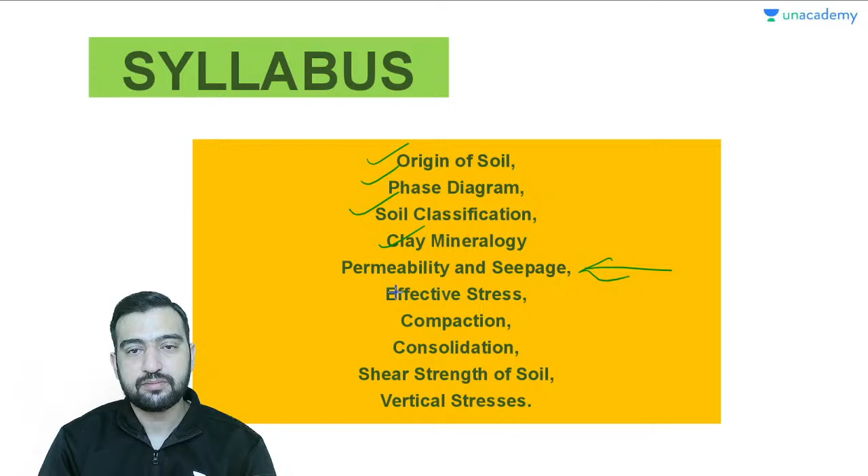Chaliye, so now let's start session number 23, and this session is really very important. Topic for today's class is FlowNet. You can say it is the last topic of the seepage chapter, so after today we will be closing this chapter as well. This is the last chapter, last topic of seepage.

FlowNet. So what do you think FlowNet is? Tell me, any idea anyone? Okay, see, I'll tell you.

There is a Laplace equation. The Laplace equation is like kx, del square h by del x square, plus ky, del square h by del y square, is equal to 0. This is known as the Laplace equation for the flow of water for an anisotropic soil.

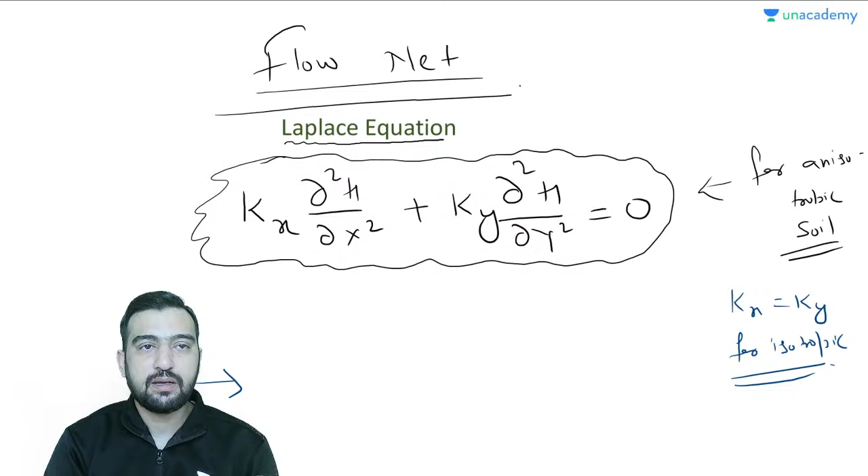But what happens if your soil is homogeneous and isotropic? In that case, your kx and ky are same for isotropic soil. Then you can write it like this: del square h over del x square plus del square h over del y square is equal to 0. So this is for isotropic soil.

So what is h? H is head. What is x and y? X and y are the dimensions, so water is flowing in the xy plane. Kx and ky were the permeability. When both permeabilities are same, we can take this permeability term common, and then we can write this differential equation. Is it clear?

Is it clear? Tell me any doubt? Saman Kumar, is it not clear?

My dear Saman, see, it is the continuation on seepage, and I have just told you a mathematical Laplace equation which is going to define your flow within the soil with respect to, you can say, boundary conditions.

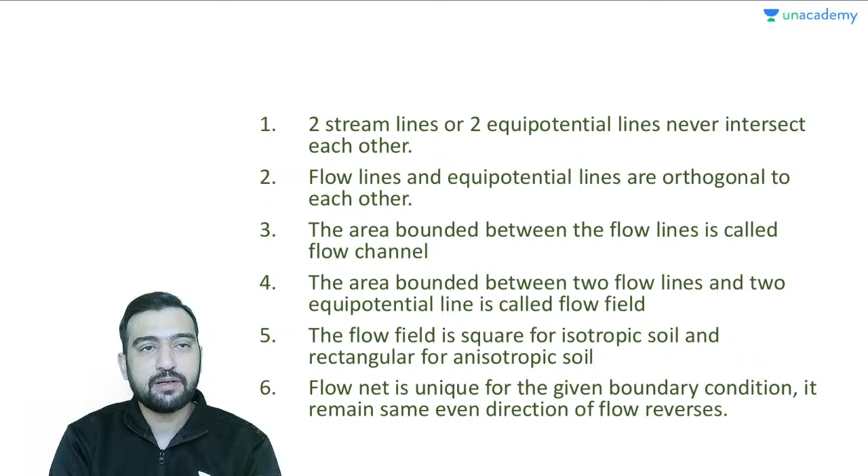So there are some properties of flow net. There are some properties of flow net. I will explain it.

What are the properties of flow net? Ravi Kumar Gupta says it is a 2D analytical method. Yes, you can say that, but we will not be studying the analytical method here.

This is a two-dimensional equation, and if you can solve this equation, you will get its solution analytically. But I am not going to solve this two-dimensional thing using the analytical method here. I don't have to use partial differential equations. I am simply going to use the graphical solution of this.

So the graphical solution of this equation is your flow net. Basically it is this equation only, and if the equation comes in anisotropic condition, we have to revise our flow net.

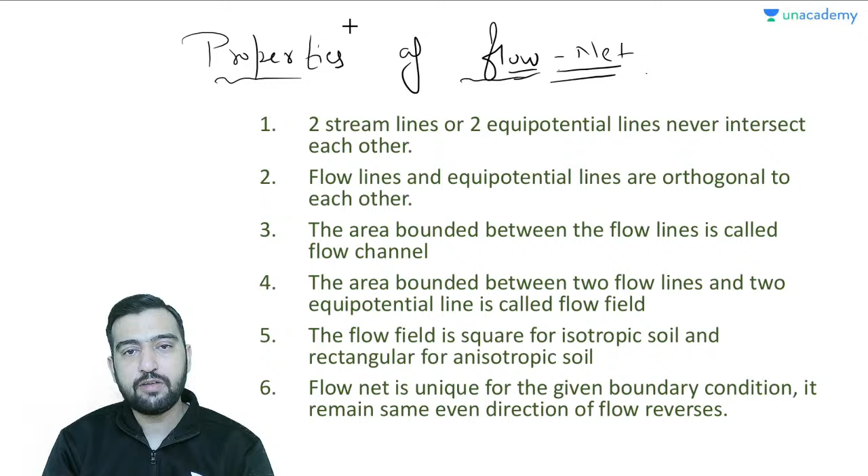So there are some properties of flow net. I will be drawing the flow net here and explaining the things one by one, showing what happens when you go into the soil system.

Let's say these are your streamlines, and let's say these are your equipotential lines.

You have to understand these properties very well. You are having these equipotential lines and this streamline. I am going to call these streamlines psi 1, psi 2, psi 3.

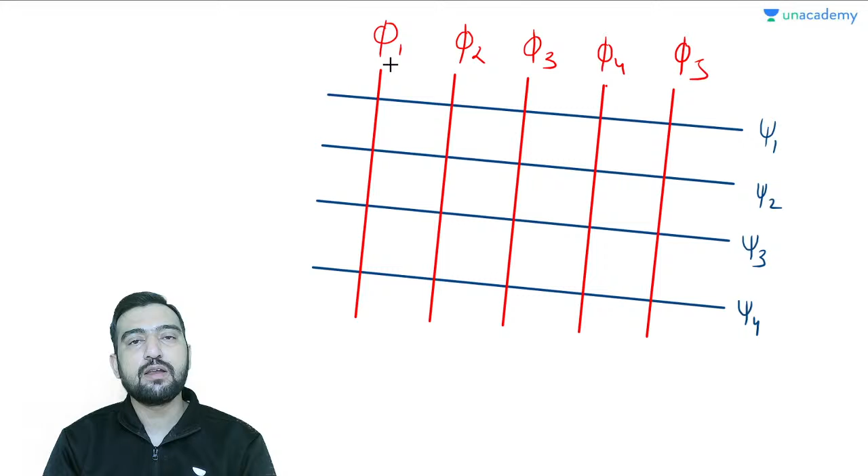Along this equipotential line your total head would be the same. Along phi 2 your total head would be the same. So whether the flow goes from here to here or from here to here depends on whether phi 1 is greater than phi 2, or phi 2 is greater than phi 1.

One thing is sure: if this is greater, flow would be rightward, and if this is greater, flow would be in this direction. This is because it is a common rule of nature that flow always occurs from higher potential to lower potential.

So psi 1, psi 2, psi 3, psi 4, etc. are the streamlines, meaning flow occurs along these streamlines, and these are your equipotential lines. So if you consider any such field,

this is known as your flow field, and these lines and this field are formed by the area enclosed between two consecutive streamlines and two consecutive equipotential lines. Is it clear or not?

So there are three passages here: passage number 1, passage number 2, passage number 3. These passages are known as flow channels. What am I going to call them? I am going to call them flow channels. Is it clear? These are known as flow channels.

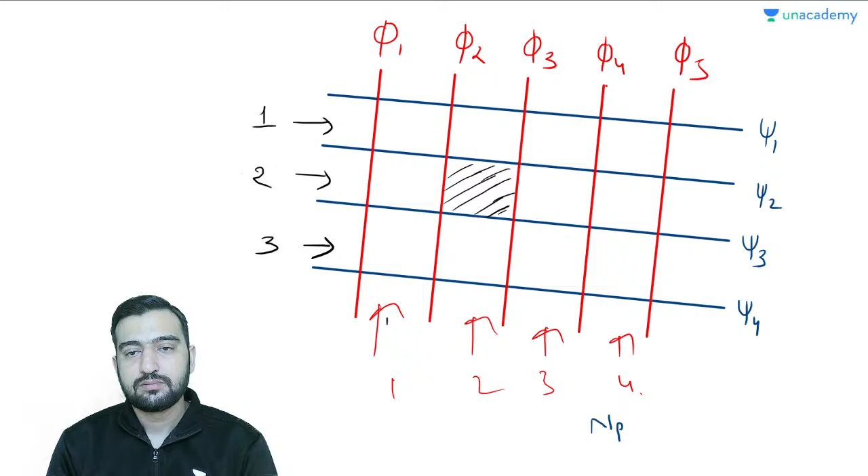So I can simply say that if ND is the number of equipotential drops, and NF is the number of flow channels, then small nf and nd are your number of streamlines and number of equipotential lines. Let me write it here: NF is number of flow channel,

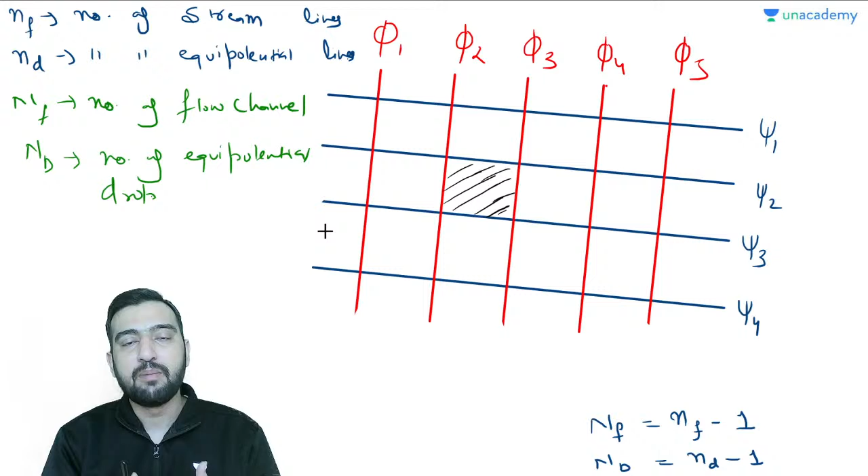But what will happen, my dear friend, when I incline my table only by a very little amount? Still you will be able to move, the water will be able to flow, because due to the tilting of the table, the difference in elevation, the difference in total heads, is there at various points. So now the water is simply trying to stabilize itself by going from the higher potential to the lower potential. That is going to be the case here, my dear friend.

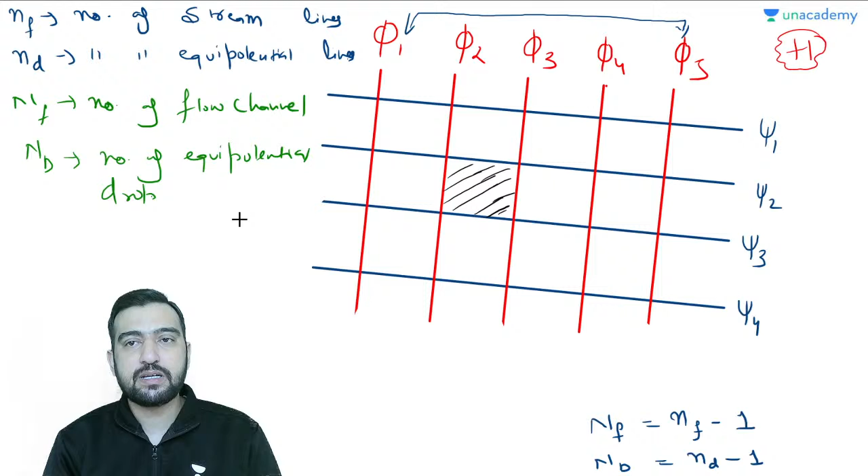Is it clear? So let me tell you, if from here to here the total drop is H, and I am interested in writing the Darcy's equation. What is Darcy's equation? I know that Q is equal to K I A.

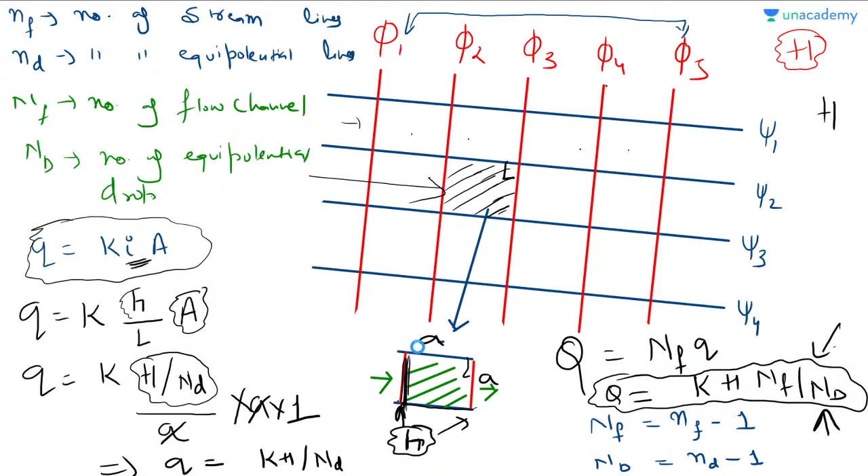Now let me come over to the properties. What are the properties saying? First, two streamlines or two equipotential lines are never going to intersect each other, it cannot happen. Next, flow lines and equipotential lines are orthogonal to each other, meaning this angle is always 90 degrees.

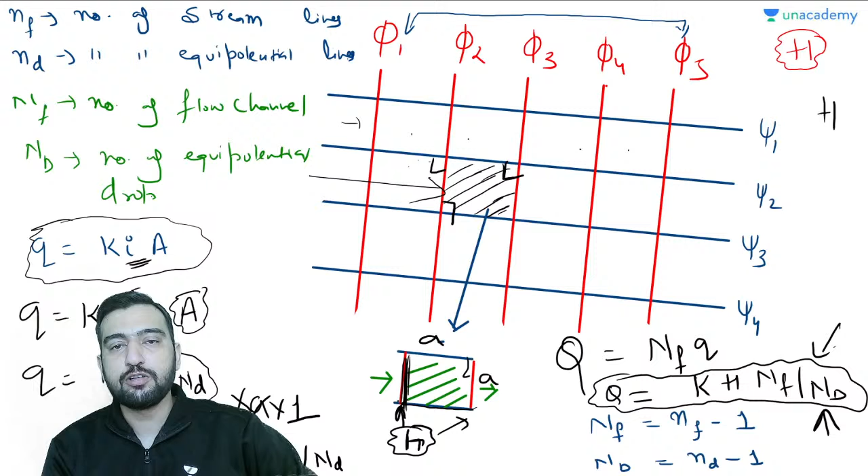Now, the area bounded between the flow lines is called a flow channel. I have used this term a number of times. So this is one flow channel, this is the second. The area bounded between two consecutive streamlines is known as a flow channel.

After that, the area bounded between two flow lines and two equipotential lines is called a flow field. I have already used that, taken this flow field out here, and this trapped area is known as a flow field. Other than this, the flow field is square for isotropic soil and rectangular for anisotropic soil.

So in short, whenever there is anisotropic soil, the flow fields will not be square, they will be rectangular in that case. But from an analysis point of view, we will be shrinking the longer side so that it can be equal to the other side, and we will analyze it like that. Eventually, we will be able to keep things after applying the conversion factor.

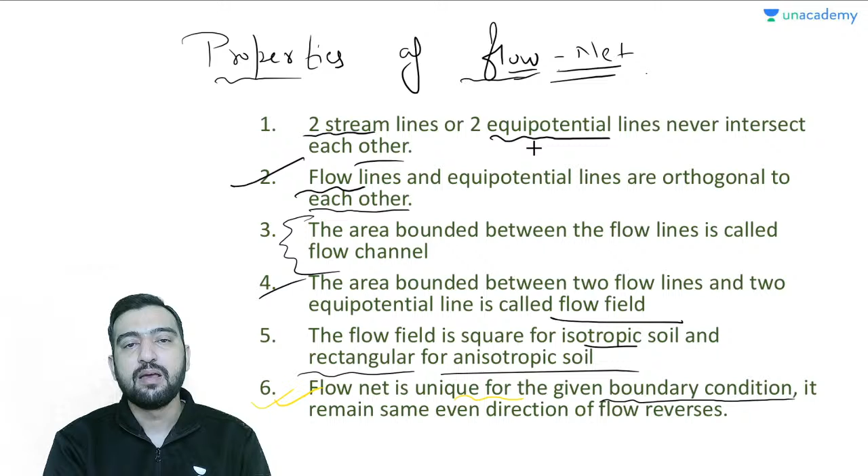So all these are really very important properties of flow nets, and I have shown you how we can derive the discharge for a flow net. And for those who might be thinking about where these blue lines and red lines are coming from, I want to tell them one more time: it is just obtained by solving this equation graphically and plotting the results on the graphical line.

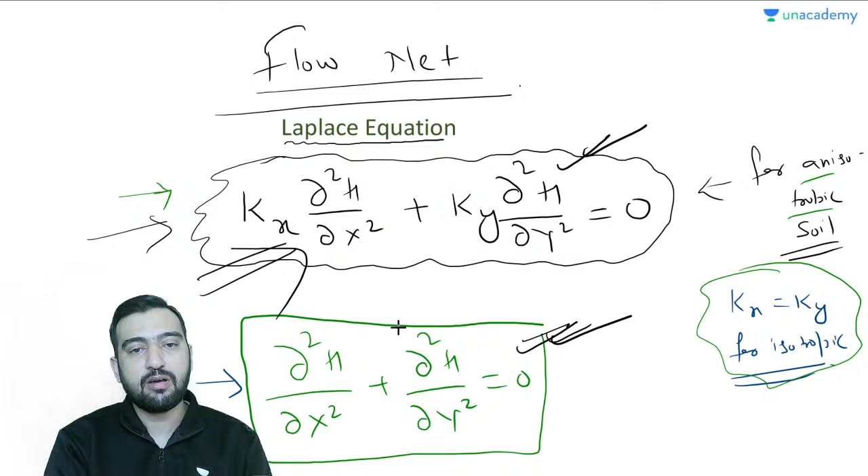So this solution comes out to be, you can say, two things. Somebody may think, here is only h, here is only h, then how come phi and psi can come? You know that your potential function and stream function, your velocity can be defined as a function of head only. Your potential can also be defined with the help of velocity and head only. You may remember from fluid mechanics: the velocity stream function, del h by del x, del h by del y, like that vx vy, and there are potential functions as well. So from there you can convert, not an issue.

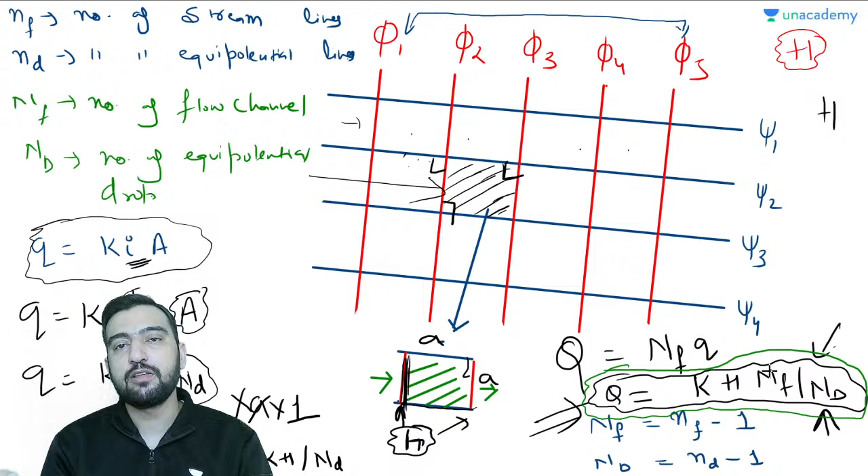So this is the thing, and this is the main thing I want to highlight, that this is your discharge equation. It is really important. So whenever it comes to numericals, things become easier, because flow net problems, I would say, are very difficult to draw, but solution-wise they are very easy. So it is a type of question which takes more time in framing the question.

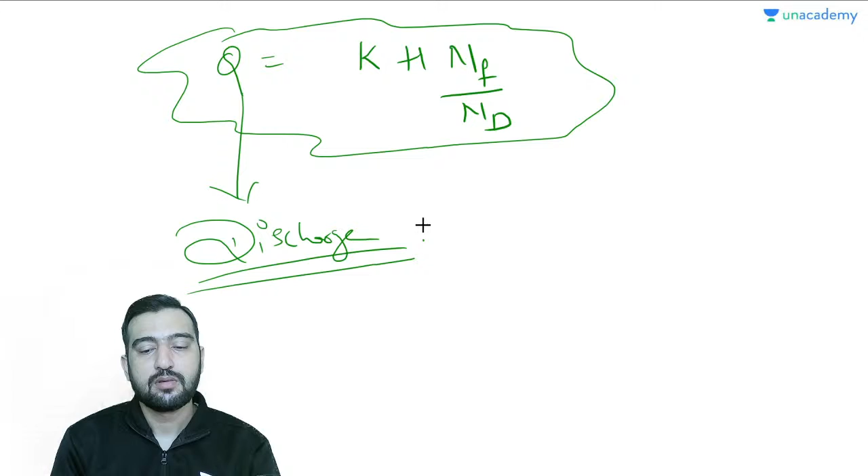So this is the thing. For example, if I want to tell you that q is equal to k h nf by nd, just give me the value of nf and nd here. I am only interested in the value of nf and nd. You have to tell me the value of nf as well as nd. What are the number of flow channels and how many number of drops are here? You have to tell me this.

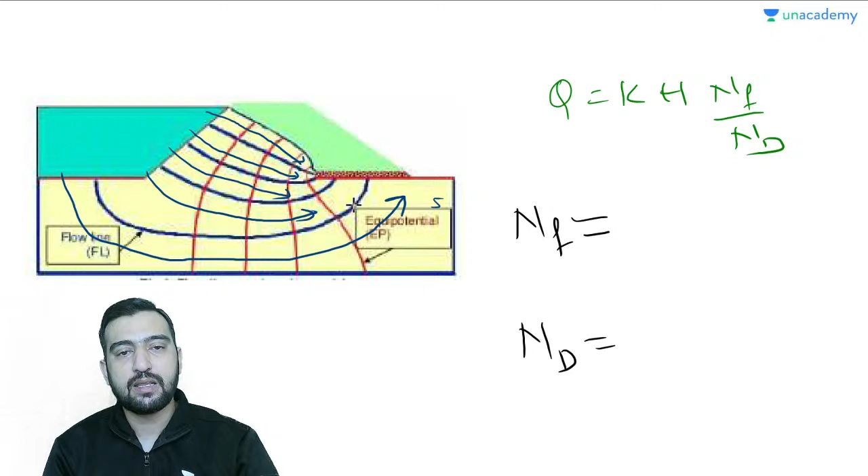This blue with blue simply represents the flow line. So this is also your flow line. This is not the end, it is here. They have covered the entire zone. So this is your fifth flow channel, this is your fourth, this is your third, this is your second, this is your first. Like this, you can write the number of flow channels here. So total number of flow channels here are 5.

If somebody asks you what is the total number of flow lines, you can say 6. Line number 1, line number 2, line number 3, line number 4, line number 5 and line number 6. So tell me if you are agreeing to me. So number of flow channels are NF minus 1.

Now let me talk about drops. Water is actually entering here. So here water must be at the same energy level. It is entering from this side now. So initially here the energy would be same. So the first drop is from here to here.

This is your phi 2, this is your phi 3, this is your phi 4, this is your phi 5, and this last one, they have written here in red, so this is your phi 6.

So let's say it is dropping here to here, 1 meter. So 1 meter, then 1 meter, then 1 meter, then 1 meter. So total how many lines? 1, 2, 3, 4, 5, 6. So total number of equipotential lines are 6 in number.

But equipotential lines are 6 in number, then the number of equipotential drops would be ND minus 1. It would be: first drop, second drop, third drop, fourth drop, fifth drop.

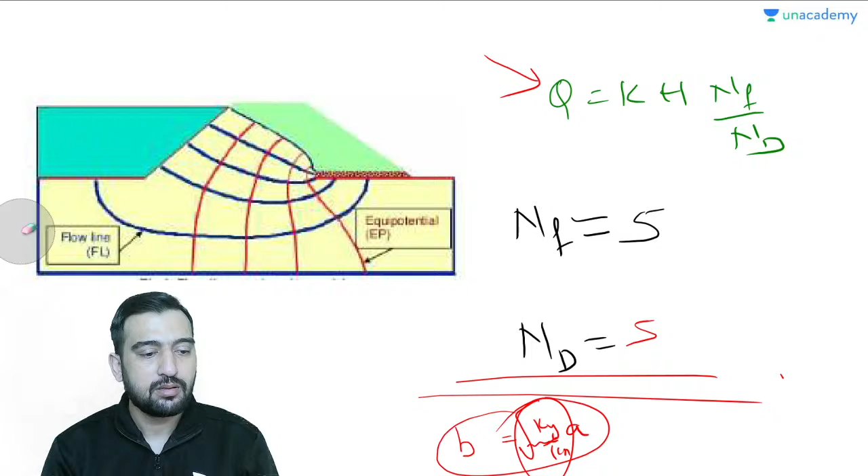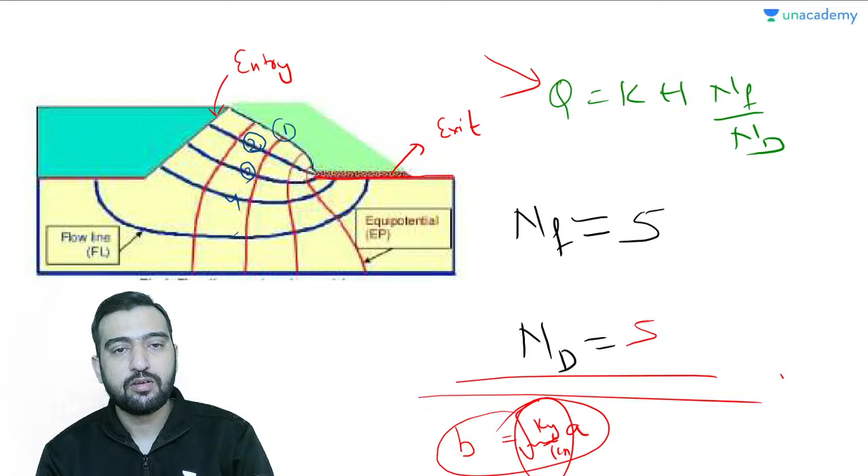See, this is your entry, this is the exit. So at entry, this is the same potential level, because when water is entering here, see, this is the red line. It is first, second, third, fourth, fifth, and sixth. Okay, and lines are first boundary line, topmost flow field, flow streamline, second, third, fourth, fifth, and this is last, sixth one.

So there are total number of equipotential lines, 6, and streamlines are also 6. So drops and channels are 6 minus 1 and 6 minus 1. So like that we can calculate, we can count the NF and ND depending upon the boundary condition.

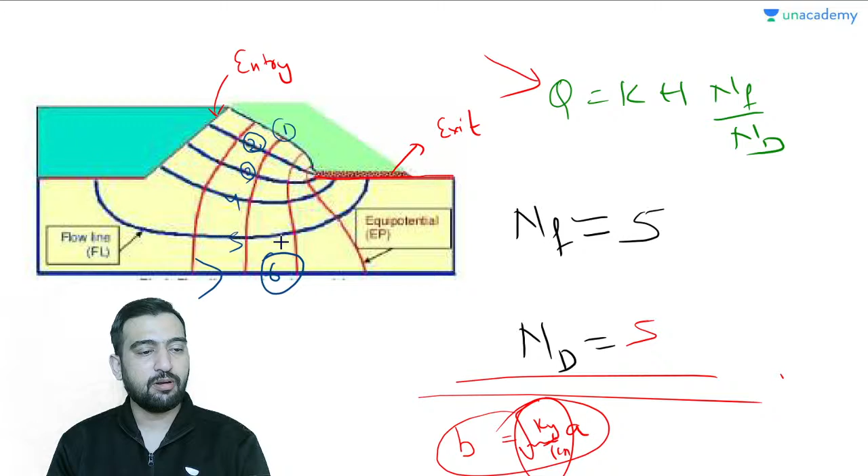Okay, so before that, let me ask you one question. So I have a question for you. So today already 9:35 is there, we have not done even a single numerical. So try to answer this.

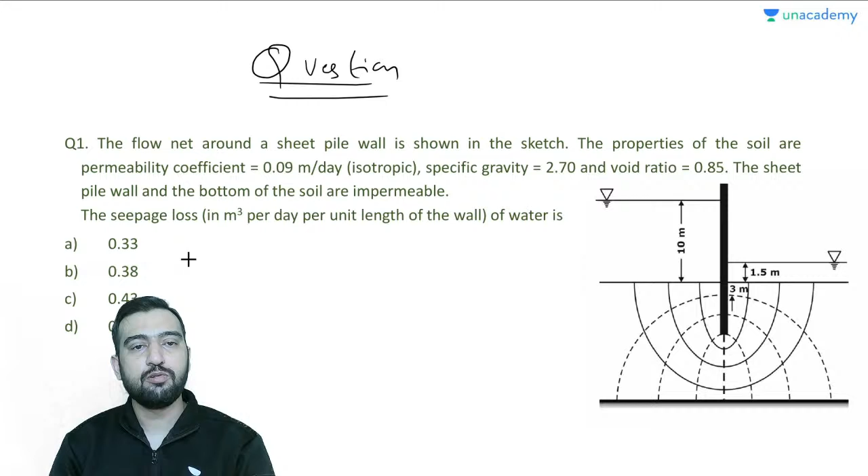The flow net around a sheet pile wall is shown in this sketch. The properties of the soil are permeability coefficient of 0.09 meter per day, isotropic, specific gravity is 2.7, and void ratio is 0.85. The sheet pile wall and the bottom of the soil are impermeable. And what is going to be the seepage loss of the water?

Okay, see, this is the upstream condition. So this is your entry, this is your entry, this is your exit point. So you only have to see, or you can say you only have to count total number of equipotential lines as well as equipotential flow lines. Only these two things you have to count, then remaining question is nothing, my dear friend. Okay, just try to think over this. What is going to be the approach here? Is it clear?

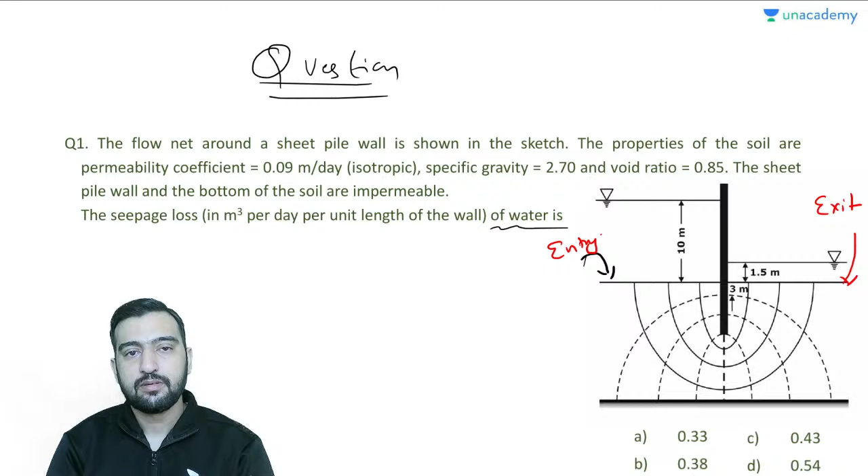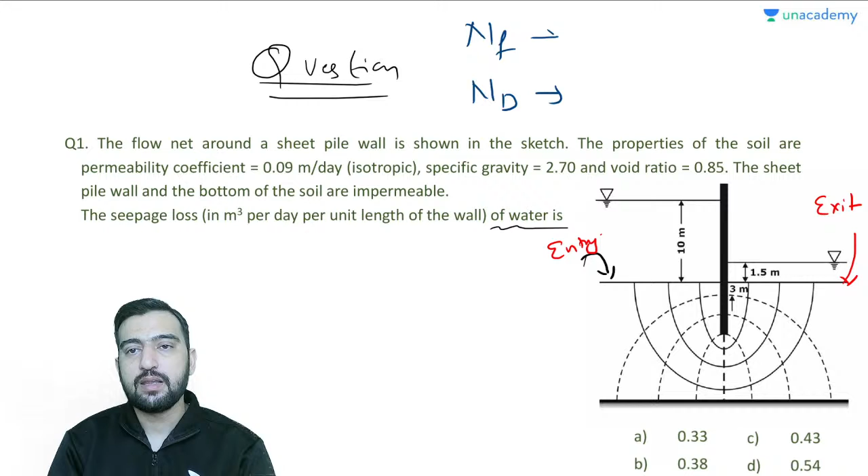Option A, B, C, D, and I want to clear out this space. So tell me guys, I am only interested in knowing how much is the NF here and how much is the ND. First of all, tell me only this thing. Rest of the things are nothing here.

Number of flow lines, seepage loss you have to calculate in meter cube per day. How many number of flow lines are there? See, entry, exit. Okay, first, second, third and fourth. So total number of flow channels are 4 and number of lines are 1, 2, 3, 4, 5. Along this sheet pile is going to be your top flow line and this bottom boundary is going to be the bottommost flow line. Now what about drops? What about drops?

It is entry, it is exit. The total head is of 8.5. Okay, at entry it is 10 and at exit it is 1.5. Total head difference is of 8.5.

And my dear friend, this is first drop, this is second, third, fourth, fifth, sixth, seventh, eighth. So total drops are 8, and if somebody asking you how many lines are there equipotential, then you can say 9. First line, second line, third line, fourth line, fifth line, sixth line, seventh line, eighth line, ninth line. So out of the total these 9 lines, you can say that number of drops are 8.

So Shamala has given the answer. Let me check it. So Q is equal to, you know the coefficient of permeability, it is isotropic, it is 0.09 meter per day.

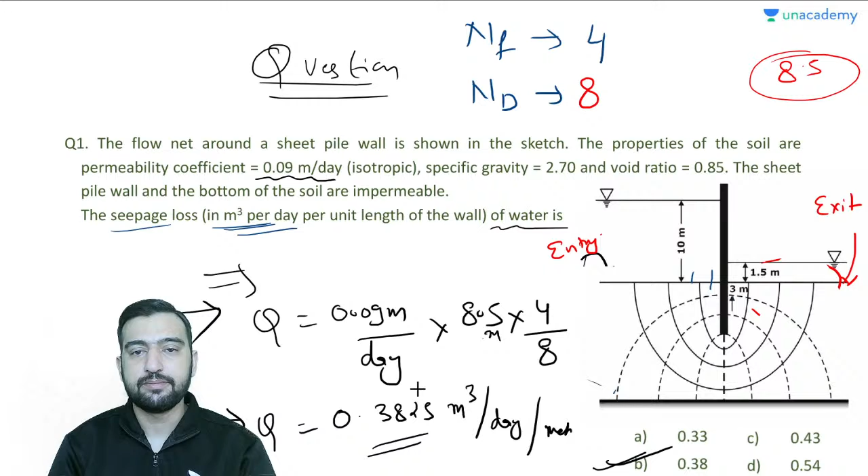Is it clear? So which option? We would like to go with option number B. Is it clear to all my dear friends? Let me know. Okay, then here is question number 2.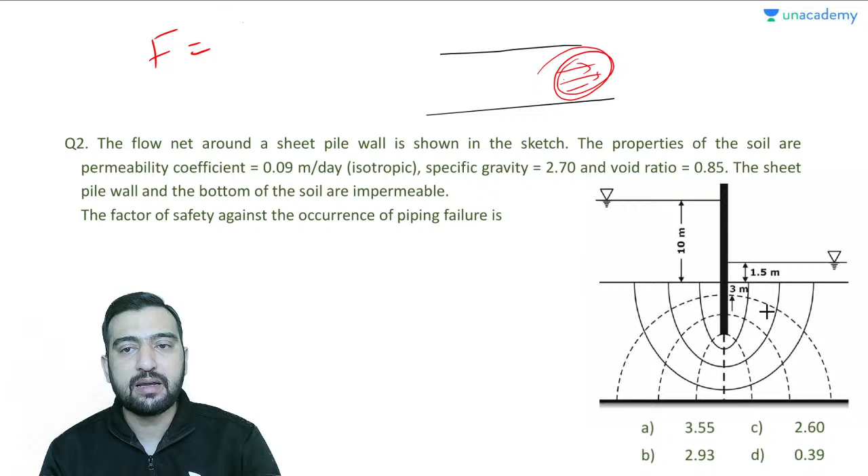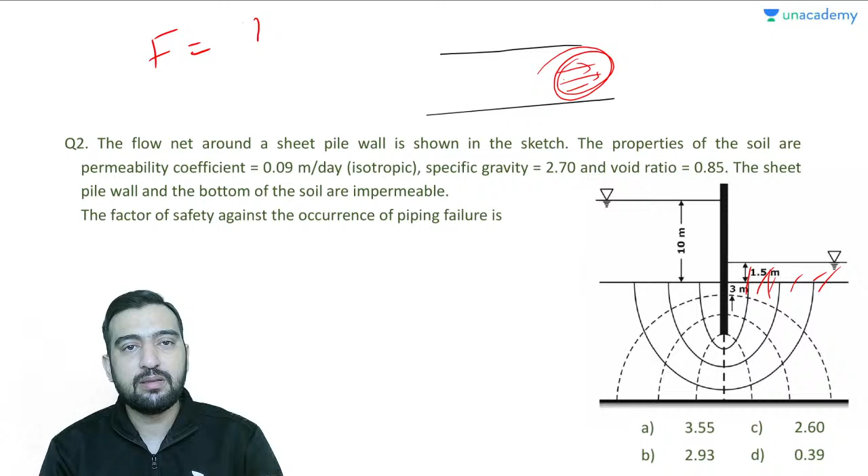For that, what you have to do is calculate the factor of safety. Since the piping phenomena occurs at the exit only, where the lack of confinement is there, because these things will not be there at the entry point or in between. Here the soil has much chance of erosion, so we have to calculate this piping at exit. This is simply equal to critical hydraulic gradient upon I of exit.

If critical hydraulic gradient is the requirement and it is greater than the exit gradient, then it is okay, we are safe. But if I exit is greater than I critical, in that case you will be saying that it is going to be unsafe. So that is the funda here.

Okay, so first of all let me calculate the ICR value. How am I going to calculate? I am going to calculate the ICR value, that is important.

So Sabia Yasin is saying that she would like to go with option C. Okay, 2.6. Good, 2.6 is the right answer.

So this ICR is equal to G minus 1 upon 1 plus E. And those who are joining me for the first time today, they can watch my earlier lectures for reference. So it is the last lecture of seepage, but now I want to bring one practice session on permeability and seepage, where I would also like to cover that two-dimensional problem.

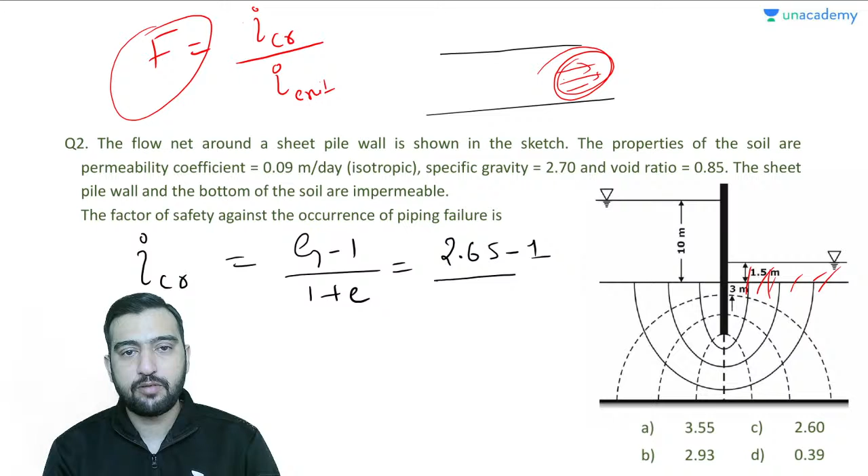So it is 2.65 minus 1. Okay, good Ravi. 1 plus void ratio is 1.85. So it is coming out to be how much?

Let me verify it. Point... okay... 918. Okay, now I have to calculate.

Listen to me, I have to calculate I at exit. See, this is very important. This is very important, yes. Okay, how are you going to calculate I at exit? This is important, see.

First of all, pick up the last flow field. If I am considering this one, this is the flow field at exit, or you can say this is the flow field at exit. How much is the length from here to here? They have given you, it is how much? It is 3 meter. If you are going to draw, this is your flow field, this is your exit flow field.

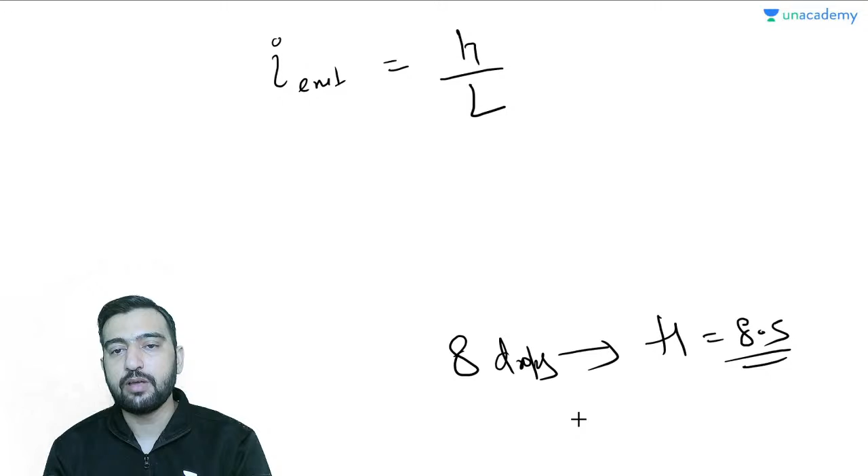So total H for 8 drops is how much? 8.5 - 10 minus 1.5. So for 1 drop it is how much? 8.5 over 8. So this H is how much? 8.5 over 8.

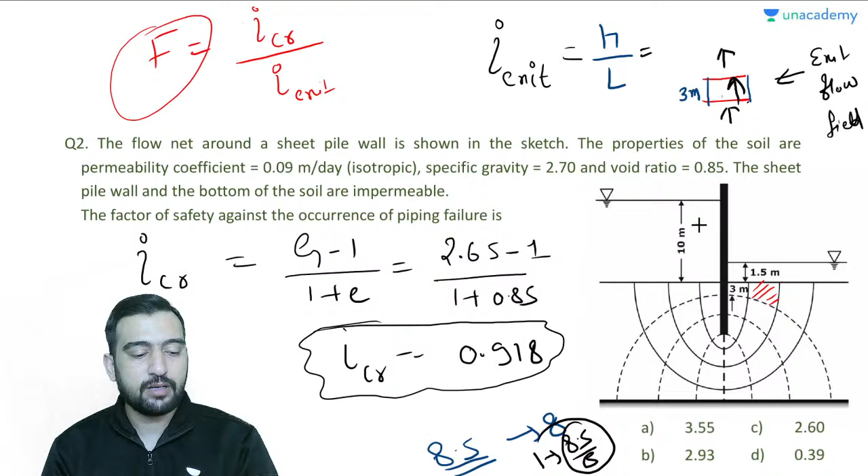Now what is the length? How much does it have to travel for this 8.5 over 8 head loss? It has to travel from here to here. So what is the length? So length is 3 meter.

So what is this value? i-exit value is how much? What is this value? How much is this i-exit? If you are going to calculate this, it is going to be equal to 0.35.

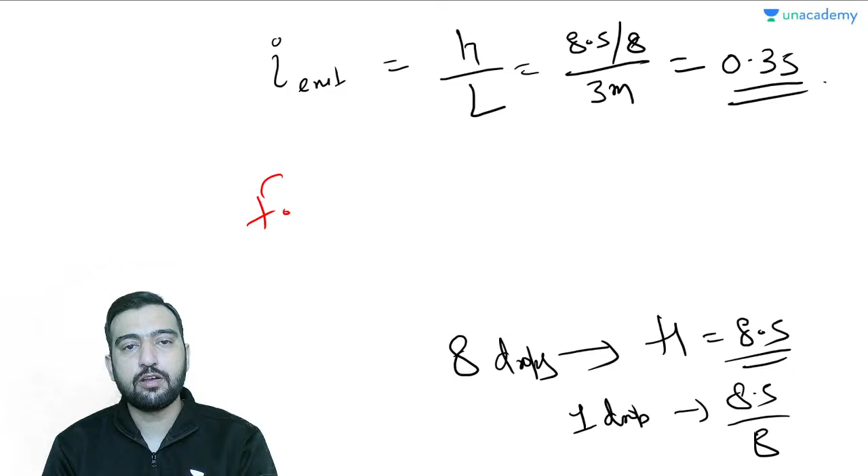So now it's the factor of safety. Factor of safety is simply your ICR upon i-exit. This is equal to 0.918 over 0.35. So answer is coming out to be how much? You guys are saying 2.6. I am also telling you, 2.6 is the right answer. 2.6 is going to be the right answer.

Is it clear to all my dear friends? Tell me. Okay.

So practice session I will be taking on, you can say, seepage and permeability.

Okay, good. I hope Ravi, now you got the concept. I hope you got the concept now.

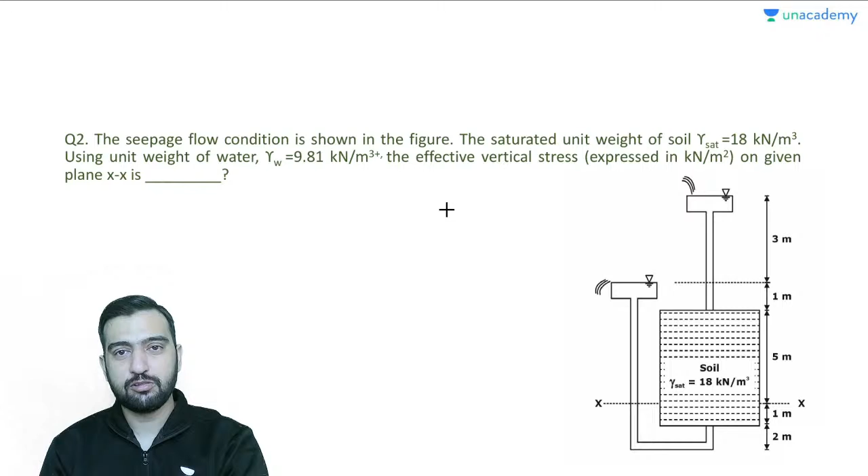Good, so guys, I have one more question on consolidation, but that I will take later.